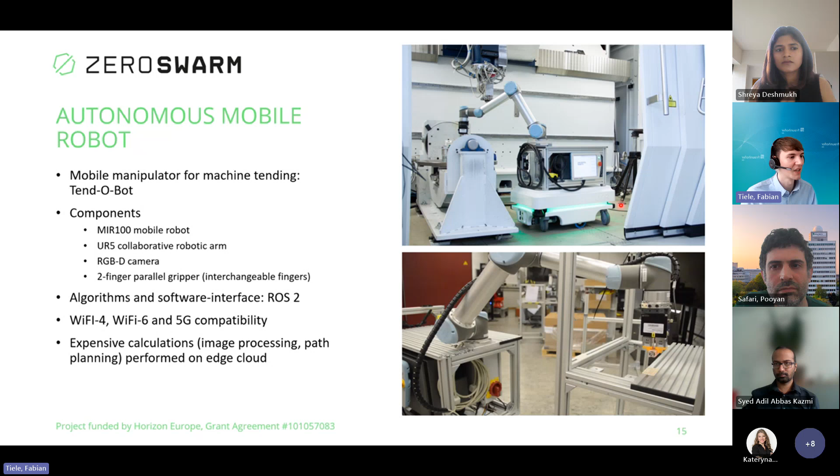And yeah, this is what Dr. Pooyan Safari from Fraunhofer HHI will now explain to you, and also he will give some insights into our network setup used in the trial.

Thank you, Fabian. Hello and good afternoon. And sorry for my voice, I'm a bit sick.

I will briefly introduce the Edge Cloud as one of our necessary infrastructure for our trial. This is Fraunhofer Edge Cloud, or FEC in short, and it's a blueprint of a Fraunhofer initiative to create an edge cloud environment for research, development, test, and demonstration of various use cases and applications.

Data sovereignty, such as GAIA-X, IDS, and medical data space compliance are at the core of this FEC concept, and they can be used for interinstitutional projects such as the one that we have in Zero Swarm between HHI and IPK, and they can be used for higher TRLs to establish, for example, spin-offs and commercialization purposes.

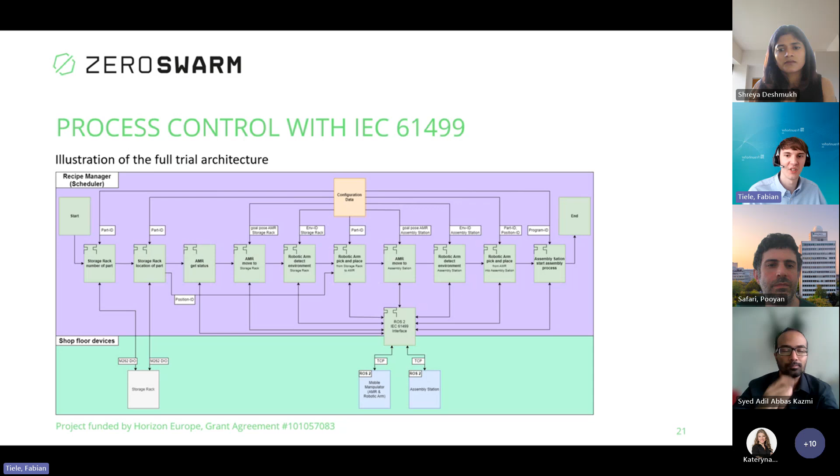So in the end, I will now show you a quick video of our AMR tending a machine, so you get a bit more of a vivid idea of what the whole thing actually looks like in action. And you can watch that now.

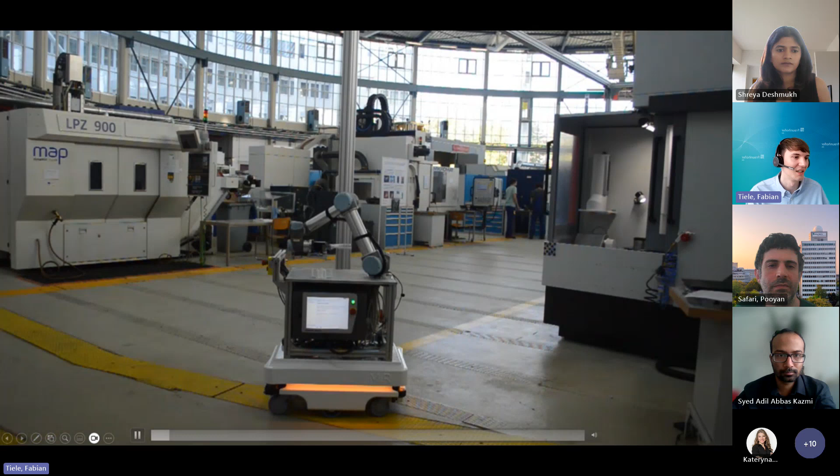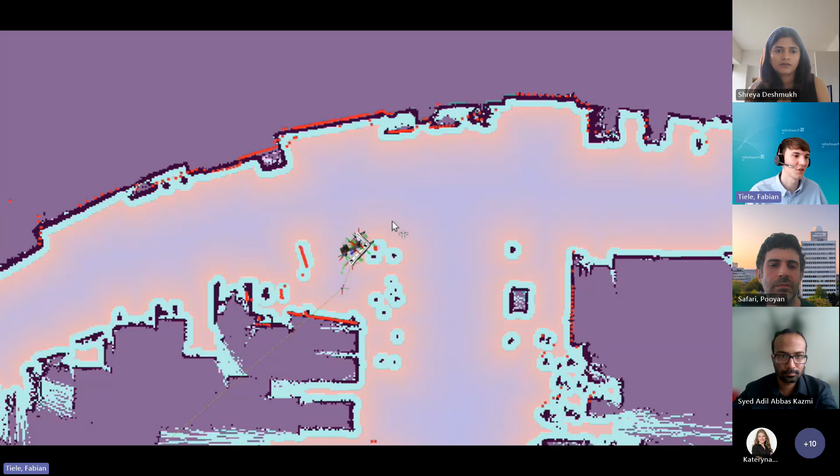So this is our mobile robot driving to this machine right now, doing the navigation and path planning. As I said, this would be done on the edge cloud, communicating via 5G.

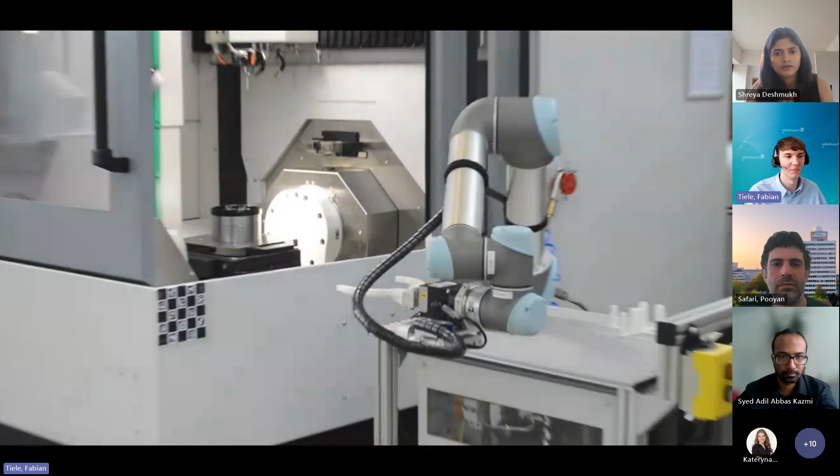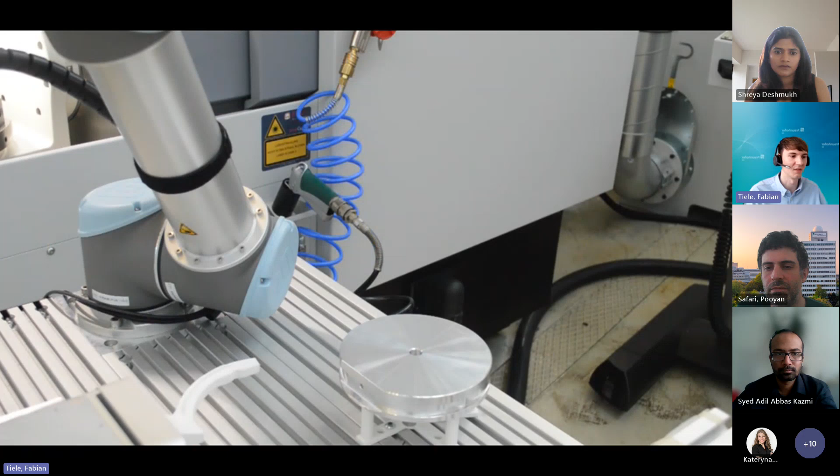When it arrives, it checks the marker with its camera, because the navigation always has some small tolerances. Could be a few centimeters forward, backward, a few degrees in rotation offset. And there it will scan it and then calculate its exact location towards the machine. So it can now grab this part, which was loaded by the AMR, and put it into the machine.

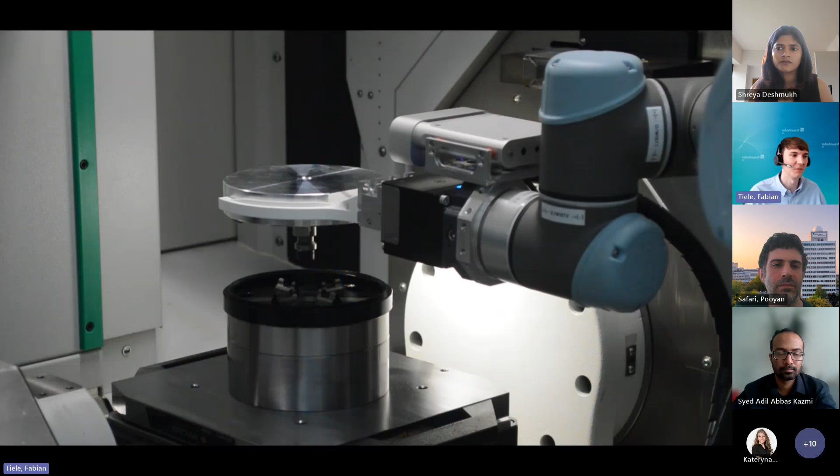Also, all this path planning and collision avoidance with the machine is calculated in the edge cloud. On the robot itself, it's really just controlling the motors to do what is calculated in the edge cloud. There's also force control to make sure the part goes into this very small specific hole, and again, control is done on the edge cloud and communicated via 5G. For these control tasks, there's really a need for low latency, which can be provided by 5G.

Okay, now we get to a quick summary of the key points we explained today. First, ROS2 is used a lot in the robotics community and enables fast and efficient development of robotic applications. On the other hand, ROS2 isn't really supported in an industrial environment, so we need something like IEC 61499, which is a much more accepted standard and brings its own advantages for integration into existing factories. We combined these two technologies to integrate our robotic application into an industrial automation use case. For that, we showed our mobile robotic arm using edge cloud technology and communication via 5G. We developed this ROS2-IEC 61499 interface, and we used 61499 to schedule the general production process. All of this is being implemented and tested in a real use case here at Fraunhofer IPK.